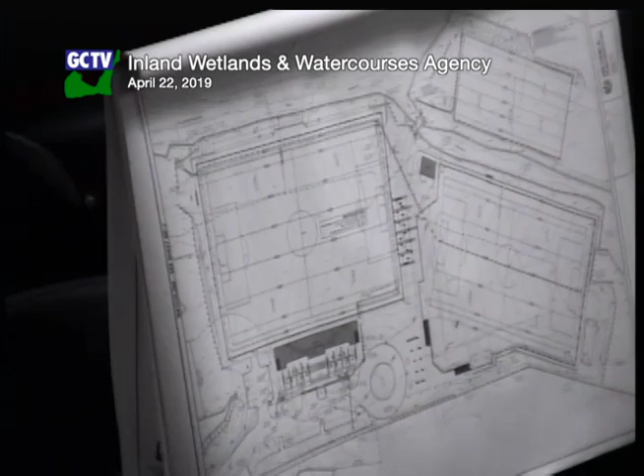So, yeah, there's 18 inches of water here during a 100-year storm. And it looks like even this location, the 50 and 10-year storms are pretty tight to the same inundation, surprisingly. Well, it's flat, so I guess it's not all that surprising. I'm not sure if you have more specific questions than that, but clearly this area does get inundated for sure.

So if I keep going around with the stormwater management approach, obviously low-impact developments per your town drainage manual. We do think we've met all the criteria for low-impact development, and we submitted that in this book.

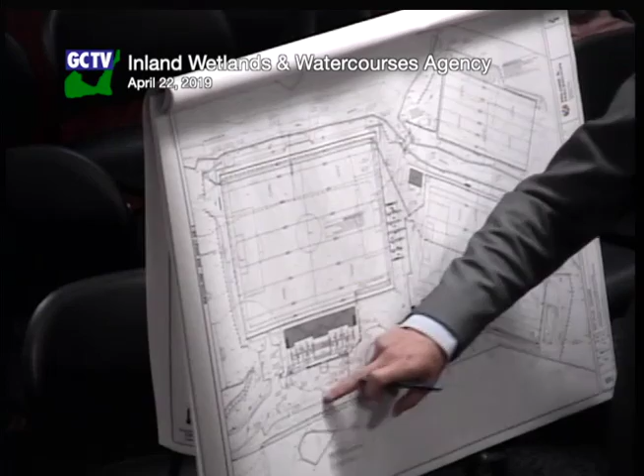Another low-impact development feature we have is this area here. This is another small rain garden on the edge of this parking lot, in addition to a small rain garden upstream, which I spoke about earlier. That will basically bisect some of the flow coming off the site and route it around to this controlled discharge location.

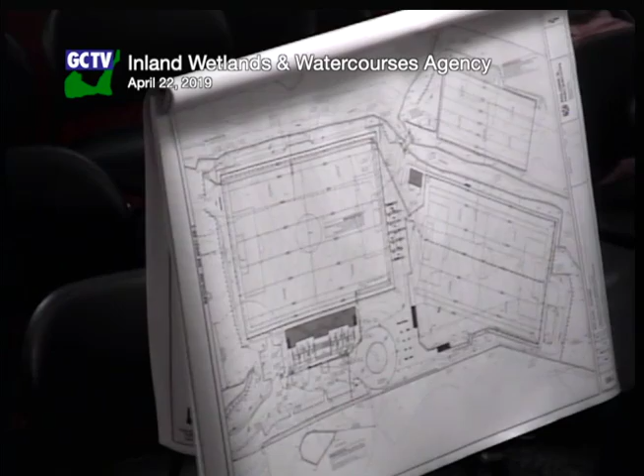And I can go through, and then maybe Megan can take over. So I'll go through the different regulated activities that we have here.

We start down in this location, regulated activity number 1. This is the work to reconstruct the roadway, Cardinal Road, within the wetland area. There's 0 square feet of direct wetland activity proposed there. In the upland area, there's 2,615 square feet, on this side of the wetland.

We go to regulated activity number 2, located here. Basically we're going to put in erosion controls for the parking lot, grade, put in utilities, put in the storm drainage improvements we spoke of, and reconstruct the bridge. In that area we have 0 square feet of direct activity, and 12,630 square feet in this area of upland review activity.

How can we replace the bridge with 0 impact?

So the abutments are basically being built on the outside of the existing abutments, and then it's a three-sided box. We will have to remove the existing abutments. There will obviously be some dewatering activities. There will be a turbidity curtain installed in the wetland, but there's no actual soil activity proposed in the creek itself.

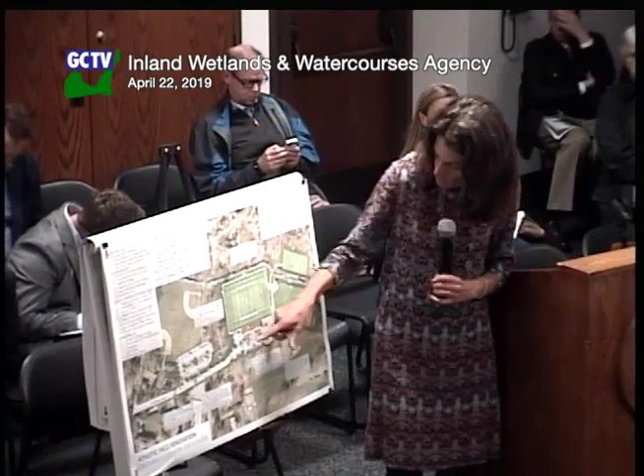In terms of mitigation, we did consider and have proposed mitigation in a few areas on the property. One is the installation of native plantings, particularly on the northern edge, where woodland is proposed to be disturbed—particularly the 0.18 acres in the northern edge of the field, the southwestern corner of the southern field, and along the rain garden here. We're proposing a variety of native shrubs in any area where woodland encroachment will take place.

Additionally, the school has agreed to pursue non-native vegetation eradication along that 400 linear feet of Greenwich Creek on both sides, north of the footbridge. This will be accomplished through mechanical removal of the porcelain berry and Japanese knotweed, with some spot herbicide as necessary. Then we're looking to revegetate and restore the vegetated condition with native plants—ideally whips of pussy willow and elderberry positioned along the creek. There's a 3-year monitoring protocol included in the proposal and written about in the impact assessment.

At this point this evening, we've received a number of comments from you just today, and some DPW comments at the end of last week. We understand and acknowledge that we have some work to do here, but we are committed to advancement of this plan and feel that it does represent a project that is consistent with your regulations, in that it does not adversely impact the wetlands or watercourses on the subject property. I think at this point we'll conclude our presentation, and we'd be happy to turn it over to you for questions.

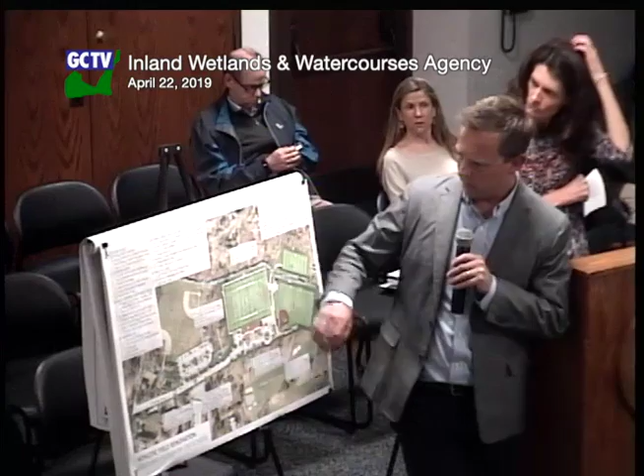This baseball field would still be fairly large, and we'd still have a football field—you could put the stadium seating further to the south, so you wouldn't need all that parking at the north end. But we would still have a field right at the edge of the creek.

Turn it the other way—the creek runs here. So we'd have the field parallel to the long side of the creek, not the way it is now, rotated 90 degrees.

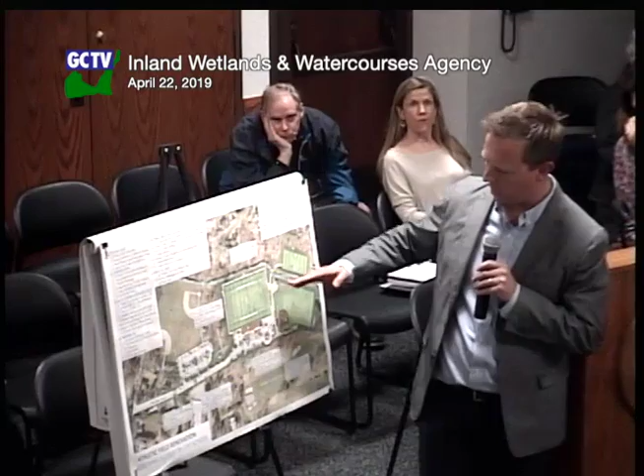Which you don't want—a soccer or football field should be oriented north-south for spectator and solar reasons. So it wouldn't be advisable at all to locate the field in this direction; it would go against the typical siting of rectangular fields.

But how would it affect the wetlands? Well, I don't see the benefit, honestly, of putting a field here and another field here.

On this side, we'd be building around a field with three-quarters of it surrounded by the creek—we'd be having the exact same disturbances.

And in this area, we really couldn't put a field here because it's floodway, floodplain. Regulatory-wise, we cannot raise the grade in that location.

Are there existing playing fields at the Stanwich School campus? There are existing fields—I believe they're improving some of their fields too, to make way for their programming. I'd like to know quite a bit more about those fields and the feasibility of using them more extensively to take the pressure off this area.

Can you provide that information? Sure, yeah—they're looking wholesale at how the entire program functions, so they're looking at that, though not specifically in my lane.

If that's germane to this discussion, it's a possible alternative, that's why I ask. Sure, I think we should provide it.

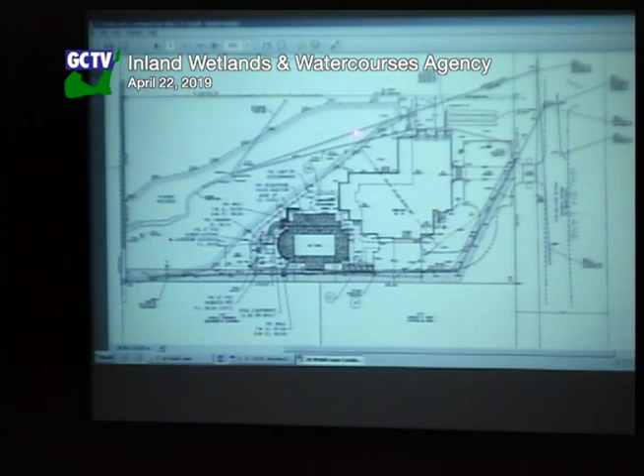The applicant now would like to take the pool equipment and shift it to the east, build a little cabana with a walkway, stairway down from a somewhat expanded pool patio. The edge of the wetland is quite close here.

None of the activities are proposed in the wetland. The entire area behind the house down to the watercourse, where the pipe daylights in this location, is maintained as lawn. This is a condition that the agency approved back in 2011.

The watercourse banks and the southern portion of the wetland, that's off this plan a little bit, have been enhanced with plantings back as part of that 2011 permit.

Looking at this, I think it's a pretty minor activity. Access will either be from the garage motor court around the east side of the pool, or perhaps along the edge of the wetland here from the west. Erosion controls installed will be all that's needed to protect that wetland during the project, and I recommend the agency issue a permit.

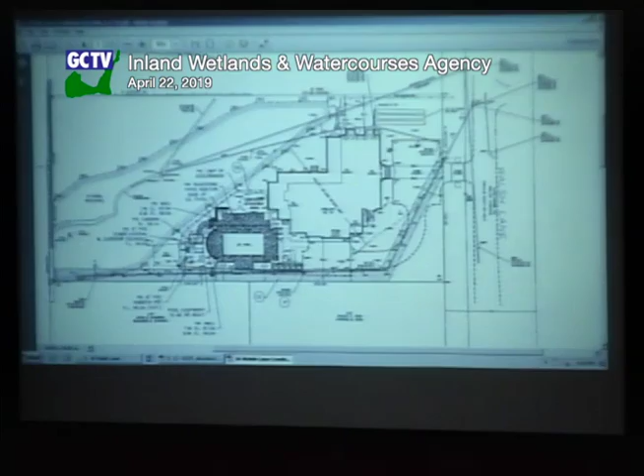Very well. Good evening. For the record, Rob Frangione with Frangione Engineering. We have no objection to any of the conditions of the approval, and I'm here to simply answer any questions should you have them. Any comments from the agency?

No? Any comments from the public? No? You have a motion? Motion to approve. Norma seconds. All in favor? Aye. Thank you very much.

2019-036, 46 Meadow Road, Rocco V. D'Andrea, Inc., for Amy Cohen and John Hartig, for reconstruction of a single-family residence.

Back last November, the agency issued a permit authorizing some residential additions and minor renovations to the existing house here at 46 Meadow Road in Riverside.

Since that time, the property owner has decided— pardon? I'm sorry, it's just that D'Andrea was here, but now he seems to have disappeared. I think he might be in the hall. Thank you.

I'm not going to give any information that's not in the staff report, so— yeah, go ahead.

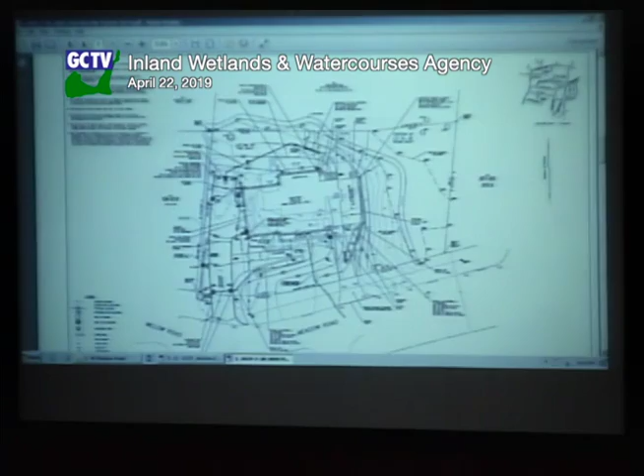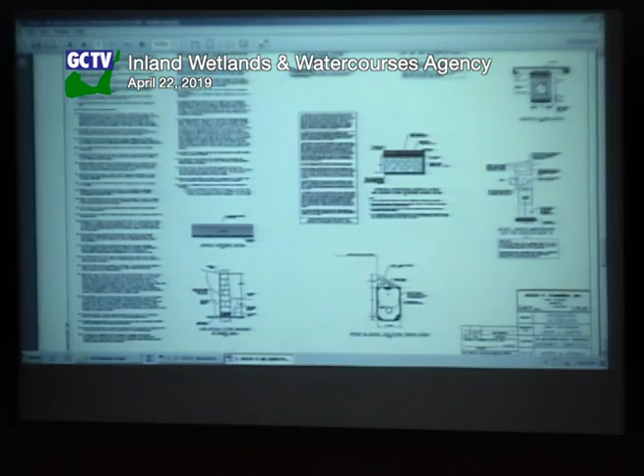Because the house is being pulled quite a bit further from the watercourse that runs to the north, there's going to be a slightly enhanced buffer with some screening plantings, and overall getting further from the wetland.

The only thing I would say is that the perimeter erosion controls, especially on the east side of the house, ought to be reinforced in some way.

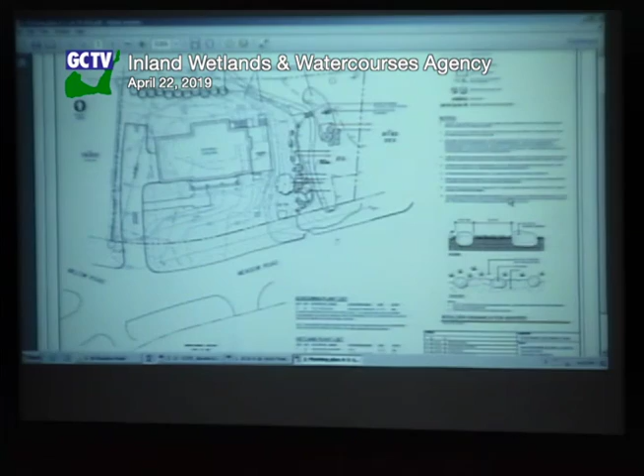A single line of silt fencing—it's a pretty tight site, and a single line of silt fencing probably isn't going to cut it. But other than that, I would recommend the agency issue a permit for this application.

Thank you. We concur with Bob's assessment. We can and will strengthen the S&E along the stone-lined channel and address the minor comments from DPW.

We do have permeable pavement on the western side. We found a seam of gravel across the front, so we separated the two LID components to satisfy the drainage manual. And as Bob pointed out very clearly, we did move it forward.

It was kind of forced by a zoning compliance issue, but as a result of having to meet that criteria, they decided to rebuild the home. Their initial intent was to remodel and live in that home, but it didn't work out that way, so hopefully you would concur.

Comments from the agency? Any public comment on this application? Motion to approve. Second.

There's somebody with a hand. I'm sorry, please step forward. So, thank you. So I've done it, and I live— no, please step to the microphone, yes. We're very formal.

One of the things we agreed to with the owners was, since we're north of them on Hidden Brook Road and the brook behind them is mainly on our property, the question we had was about the drainage pipes from the sump pump - there are 2 or 3 - which drain at the property line, but the water runs over our property to the brook. When they build the new house with the new drainage system, which I heard will have something in the front, I don't really understand what that means. Will there be pipes that take runoff from the house, or a sump pump from the basement, and put that into the brook? At what point on the property does it go into the brook? We just have a concern.

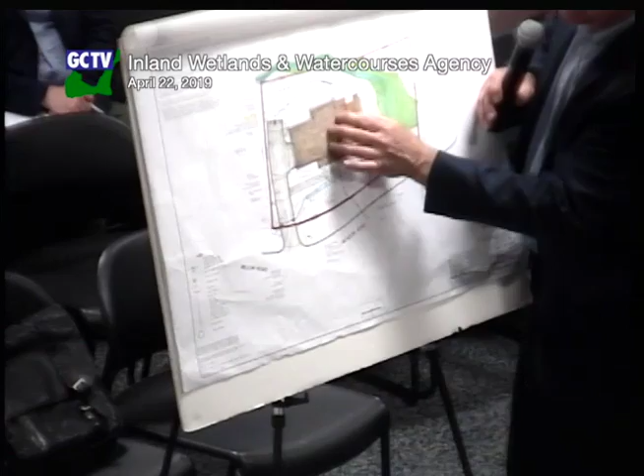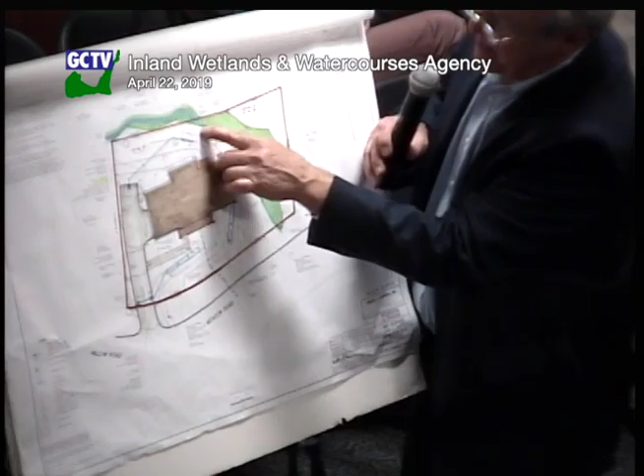We have permeable pavement on the west under the driveway, which takes the majority of that driveway and a portion of the roof. Ultimately, after that water dissipates into the ground through the gravel seam, if there's an overflow it comes to a level spreader, which has been drawn back from the edge of the watercourse. There is one pipe that exits into the watercourse approximately here on our property, and we intend to maintain that discharge for the footing drain.

So there won't be any more drainage across? Correct, not across the property. Thank you.

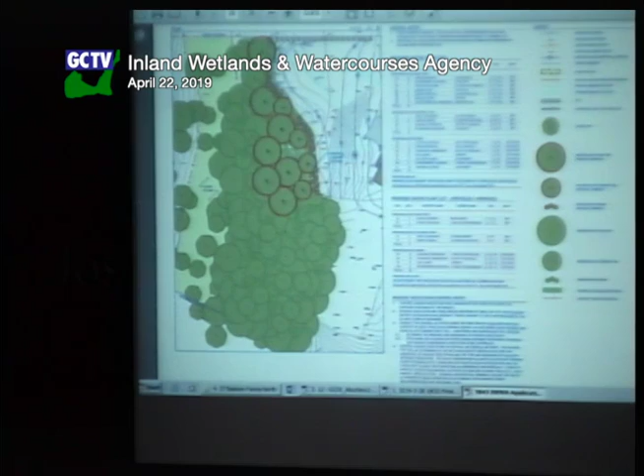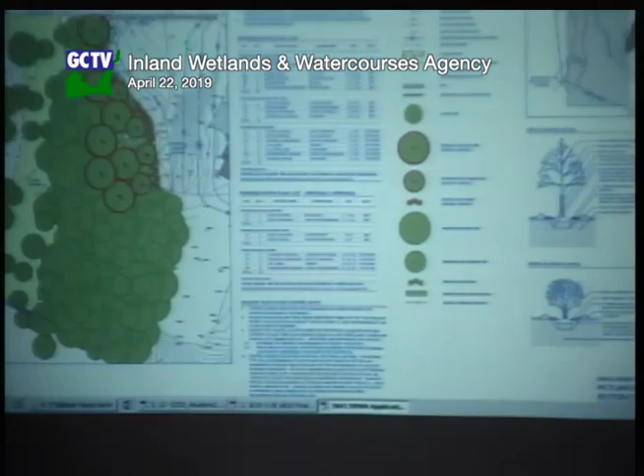On the left you have the planting plan, and in the center of the drawing you have a grading plan. Doreen's first comment is a recommendation to restore grades within about 50 feet of the wetland, so we're showing restoration of the grades within that 50 feet. To achieve that, there'll be two rows of retaining walls where the rock face used to be, essentially recreating the vertical element of that bedrock face with native stone from the site, then replanting everything within 100 feet of the wetland to the quantities and sizes Doreen has recommended.

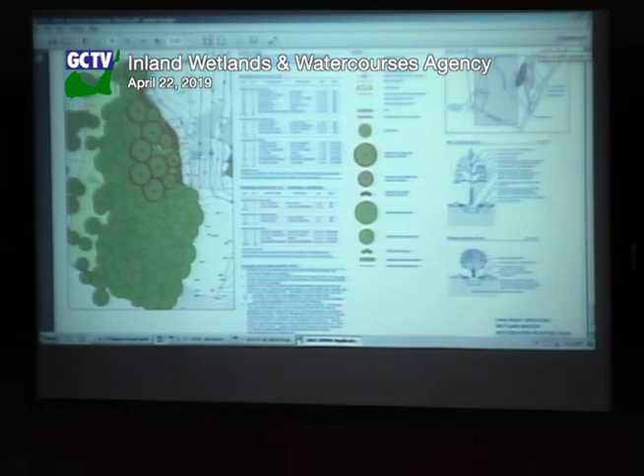We agree to the monitoring that's requested, and agree to the demarcation feature at the 100-foot mark. The owner will provide a letter stating that the filling that occurred resulted from cutting on site and moving the material to where he put the fill, and that he did not import fill in order to achieve the grades shown on the drawing.

So that's pretty much it. We tried to address Doreen's comments and are in agreement with the recommended conditions. Can you speak to the reference that the retaining wall is approved at 37 feet, but isn't at 37 feet? Yes.

If you'd like, I can give you copies of the drawings of this drawing. Would you like that right now? Yeah.

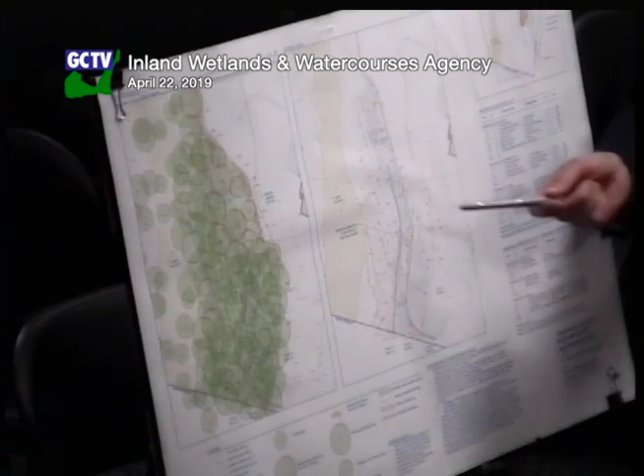Retaining walls are shown on the grading plan in the center of the drawing. One is just a gray fill, and the other, in the northern portion of the property, is more of a rock graphic. The one in the northern portion of the property is the waterfront fill.

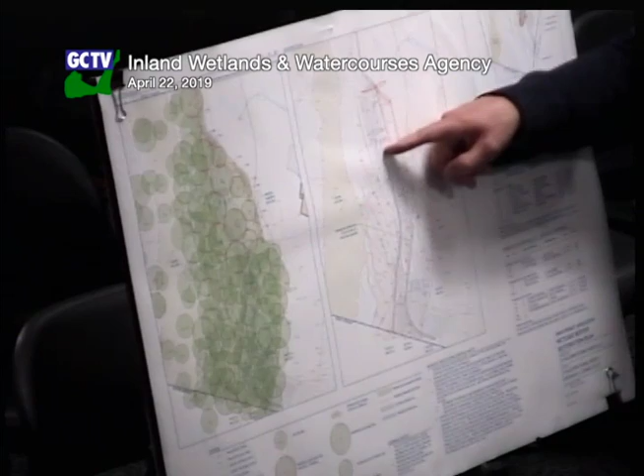This piece was approved, and what was approved previously, I think, was moved forward about 12 to 15 feet. It's not within the 50-foot zone that was requested to restore grades to, so we were able to show the grading restored within that 50 feet, keeping that wall.

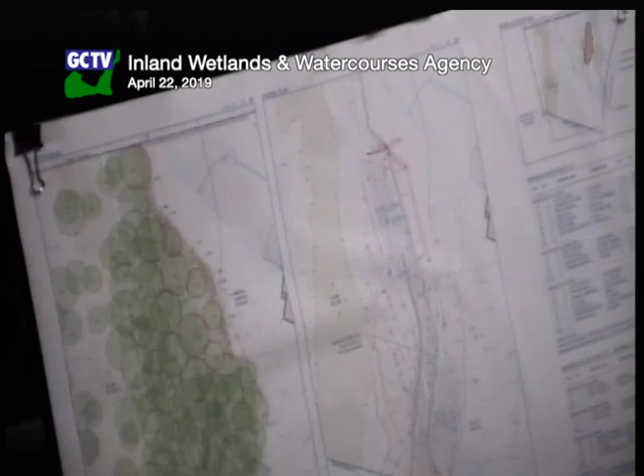It should be relocated, put back to where it was approved initially. So then we have to add a special condition indicating that the wall is to be removed, and a final construction drawing that indicates the wall will be relocated. Yes, which would go in special condition number 1.

Do you have any comments from the agency? It's a good idea, just a comment from the board. The demarcation feature, do we have to add that? No, there's already a condition for that.

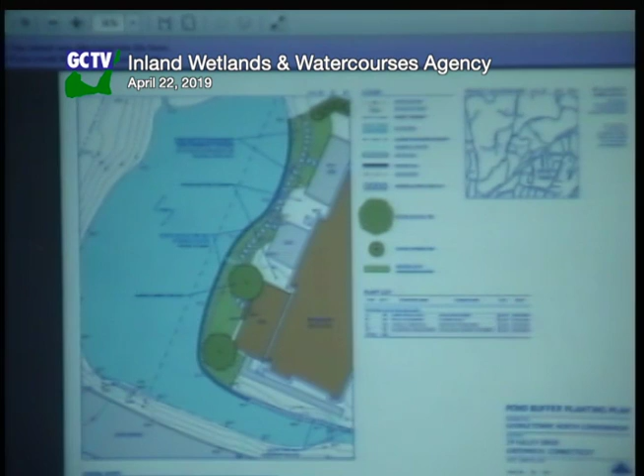As a result of that meeting, a green sheet was signed off on as a declaratory ruling that did not require a permit for the site work and landscaping involved. In December 2018, staff learned that an unauthorized retaining wall had been constructed along the front of building number 1, and that stone and fill had been brought into the site.

Along with the corrective application that was submitted, we received a report prepared by Rizzoli Planning and Engineering that provided calculations addressing the erosive velocity of stormwater entering the pond, to support maintaining the wall and ensure the structural stability of the pond edge and any nearby buildings. However, the report didn't include any drainage calculations to demonstrate that coir logs and plantings would not be as successful in shoring up the bank.

Further, the calculations are generic for the pond as a whole and do not establish the velocities that would directly impact the portion of the pond banks discussed in this application. A review of aerial photos from 1980, 2003, and a survey dated September 2014 shows relatively minor changes to the limit of the lawn due to erosion at the front of building number 1 over this period. Since a double row of coir logs and plantings were previously recommended by a licensed professional engineer, and that will provide naturalization to the pond edge and stabilize the bank and reduce erosion, it's recommended that the wall and fill be removed and that the approved plan under permit 2014-105 be implemented. We will need a detailed erosion control plan submitted that protects the pond, stream, and wetland during construction. An issuance of an order is recommended with the conditions provided in the staff report.

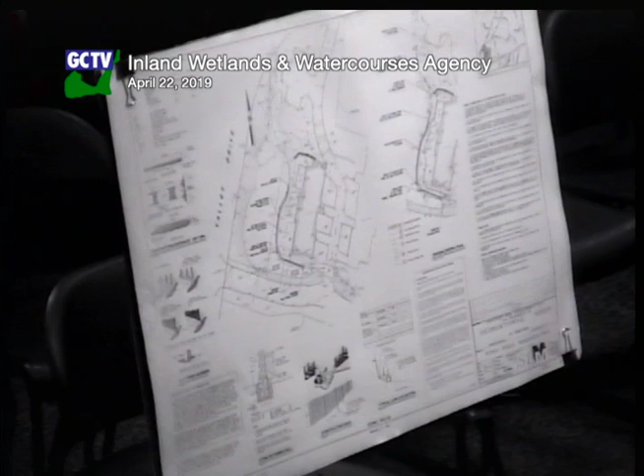Good evening, Bill Kenny for Georgetown North Homeowners Association condominium. We have met on a number of occasions with staff to come to an agreement on a way to resolve this, and the Homeowners Association is anxious to resolve this and move forward, remove the wall, and put in the coconut logs and do the plantings in accordance with the recommendations Doreen has made. We'd be willing to answer any questions you might have.

Any questions from the agency? No, let me do it. We were there, okay, the three of us. The three of us were there. Okay, the Three Musketeers. Right.

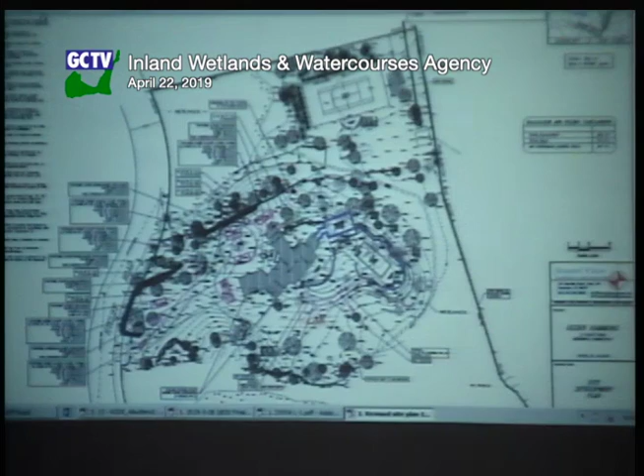The wetlands don't really need anything. The intermittent water course could use a little bit of help because their lawn is maintained as lawn on both sides of it. So I don't know whether Mr. Muller and his client have considered adding any mitigation in this area. I'd like to hear that tonight. The other thing I just noticed as I was handing out these plans...

There's a note on this plan that said, deer fence to enclose entire property, and there are little circles all the way around the property. I just noticed that's also on the site development plan, but it's not on the application form as a proposed activity, it's not in the narrative as a proposed activity, and I missed it, so it's not in my staff report. I can't support a deer fence going through these two wetlands.

I mean, these are swamps—marshy, swampy, water-filled wetlands. And there's a place for a deer fence around the residential portion of the property, I'm sure, but that perimeter deer fence, there's no way I was recommending approving that. So I guess I'd like to hear what Mr. Muller has to say about the planting and now about this deer fence.

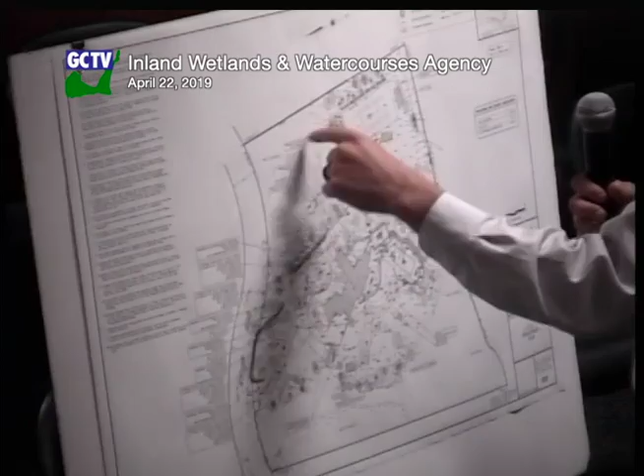Yes, it seems as though the client is okay with your recommendation for the deer fence, and that must have just come off—we must have just put that in from a landscaping plan. We probably discussed it. That's fine. We are willing to go around the wetlands. There's no need for it to go through the wetlands. He just wants to be able to protect his property. The wetlands can remain that way.

As for the design, we were fortunate enough—well, fortunate and unfortunate enough—that he's had some issues out here, that we currently don't have a CO on the property, so we were actually able to go with the old grade plane rules, which allowed 5-foot walls with only a 5-foot separation, because under the new rules in an RA4, those walls are only allowed to be 4 feet and have to be separated by 15 feet. So right now we have 10 feet of grade change here, so you can imagine we'd have to add a third wall and have all three 15 feet apart.

It just would never have worked, so we were fortunate in that aspect, as well as we pulled the pool and patio away from this watercourse wetland ditch here. We are also taking out some of these trees—they are in bad condition. If anyone visited the site or will visit the site, these are in poor condition here. We made sure we added every little thing here so that we weren't trying to hide anything. The deer fence is basically the only oversight, I think.

The DPW comments, we're going to be able to address those, no problem—that's not really a concern. As for the plantings around the ditch, I spoke with the landscape architect this morning. I didn't have a chance to speak with Ogden yet, but if you would like to talk about what you're willing to do around the watercourse here, by all means, you can come up and introduce yourself.

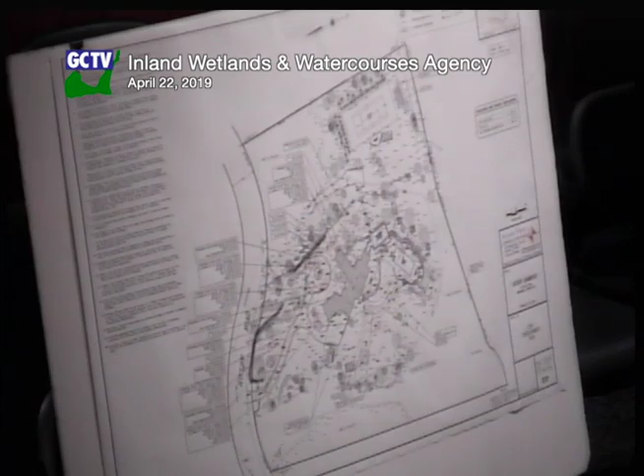As for the ditch, would you be willing to maybe plant some meadow grasses? Or?

Ogden Hammond, property owner, 11 Highcliffe Road. I haven't had a chance to talk with our landscape architect about the comment that you made, Bob, it came in this morning, but I'm happy to do that.

We love that stream, actually. We think it's a feature of the property. I'd like to accentuate it in some way. I'm not quite sure exactly what that might look like, but I'm working with you, and I'm sure also we work with staff, as long as everybody's okay with us working with staff on how we would like to get that planted.

My sense is, I don't even think it has to be continuous planting. It could be enhancing the upper part of the ditch around there, and where it gets tight around the back of your new pool, you've got a lot of plantings proposed, so maybe leave that. Then you've got some plantings at the lower end, maybe enhance that a little bit. Just get it a little bit better, and elsewhere a lot better.

Okay, I think that's fair enough. Do we need to make any changes to the special conditions?